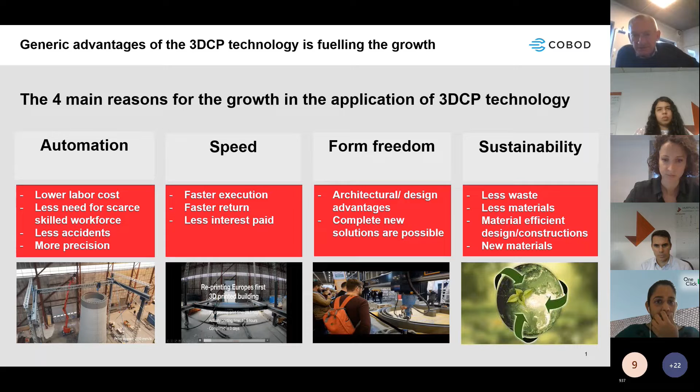The specific reason for our success is our BOD2 construction printer, which you see a rendering of on the left, and on the right you see the biggest one we've supplied so far, which was 27.5 meters in length, 12.5 meters in width, and 10 meters in height. Notice the red container standing there, and the people walking around next to it—you can see this is a big mother of a printer. It weighed 17 tons. It's based on a modular system of 2.5 meter modules, so we can build it to a maximum of 15 meters in width, 10 meters in height, and as long as you like in length.

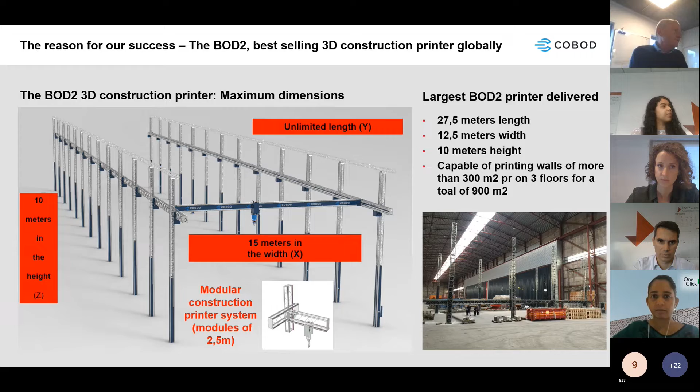It comes with 12 specific advantages. That means that because of the modularity of the printer, you can get the size that you need, so we can fit that completely.

Obviously, it comes EU certified, IP66. You can operate it outside in rainy conditions, and we have extreme speed of up to 1 meter per second. You only need 2 operators to operate it, 3 if you're doing your own concrete.

This is one of our specific advantages: we can actually print with real concrete, not these expensive mortars, but real concrete mixed on site or pre-mixed in a batching plant and then made 3D printable. We also supply full documentation and manual guides.

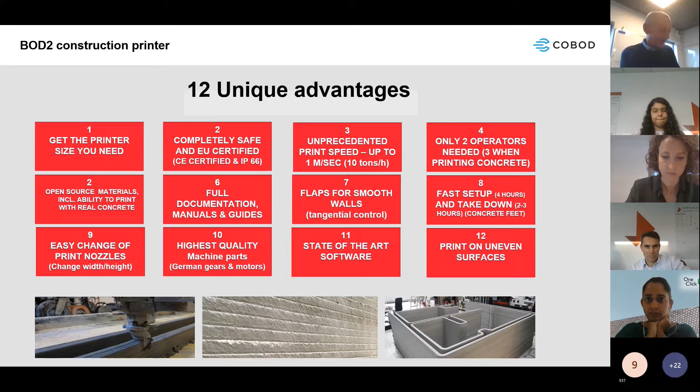Another advantage is the flaps and tangential control, which means we can smoothen the walls by putting flaps on the sides and controlling the direction of the print head. There are a lot of other advantages, but we'll skip them since we don't have endless time.

Here's an example of one of the projects our customers have done. It's important to notice we are not a general construction company, we are a tech supplier, like Caterpillar or Manitou. We supply the technology, other people use it.

This is an example from Germany, where Peri printed a 160 square meter building on 2 floors. It took 36 days, not particularly impressive, especially the ground floor where they had to get used to it. It went faster on the top floor, only 8 days. But it's fully permitted, and buyers are moving in as we speak.

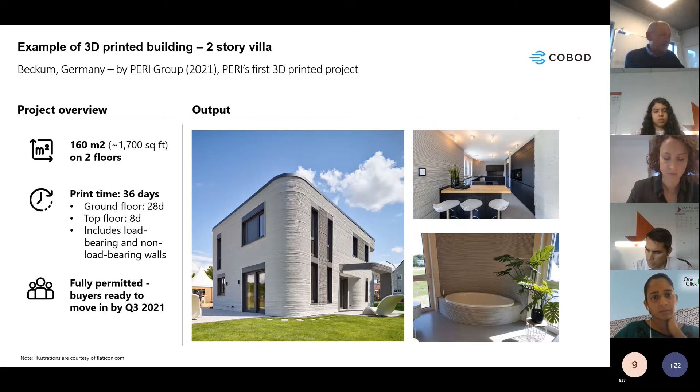Here we see the biggest building so far made with our printers, a 380 square meter building on 3 floors, made in Germany.

This is the second project of Peri, and already they improved quite a lot, down to 21 days. That's basically 60-70% of what they used on the first building, although this building was more than twice the size. So they improved productivity quite a bit. And again, it's fully permitted.

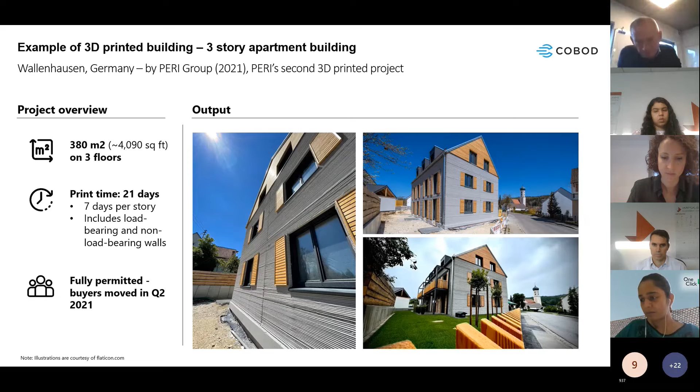This is one of the key lessons you should take home today: the power of experience. I'll give you a couple of examples. On the left-hand side, you see the start of printing Europe's first 3D printed building, please play the video.

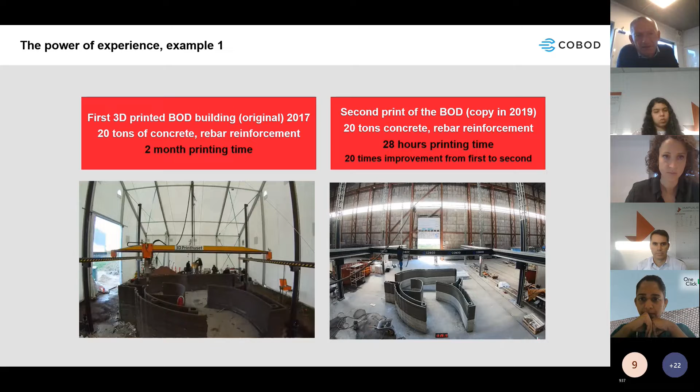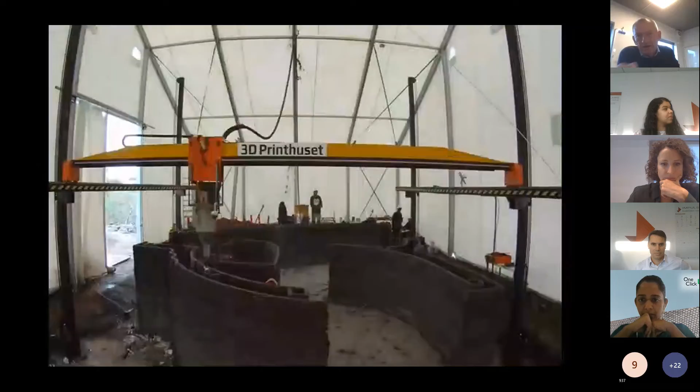This was done back in 2017, and we were amateurs. We really didn't know what we were doing. We made a lot of mistakes, to be honest. Everything was done in the open, that's how we are, we always tell honestly about our results. We were not very satisfied because it took 2 months in total.

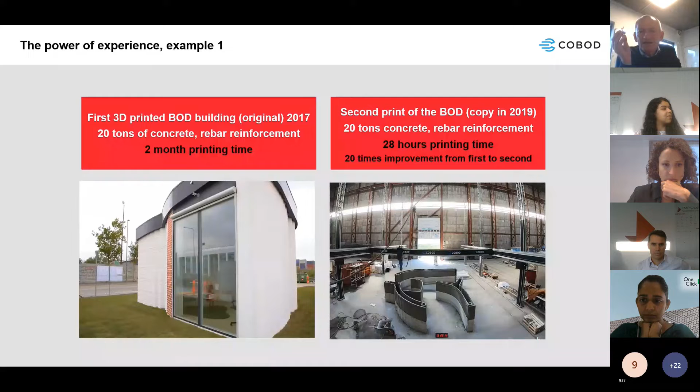But we did learn a lot. So by 2019, we said let's see, now we have a better printer and we learned a lot, let's see how fast we can build a copy of that building. So we printed it again, please show the video.

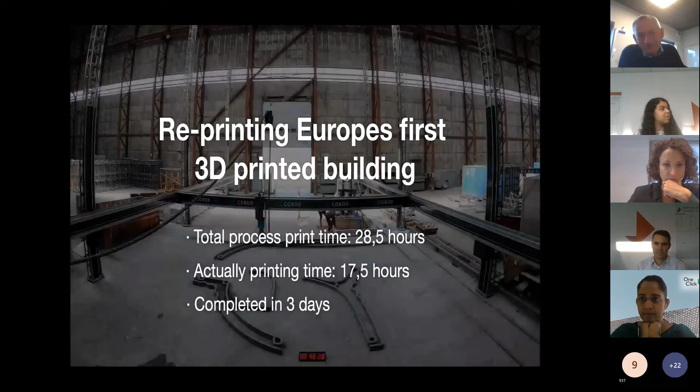One more time we took it upon ourselves to print an exact copy of what we did the first time. This time it took 28 hours. So we went from 2 months to 28 hours.

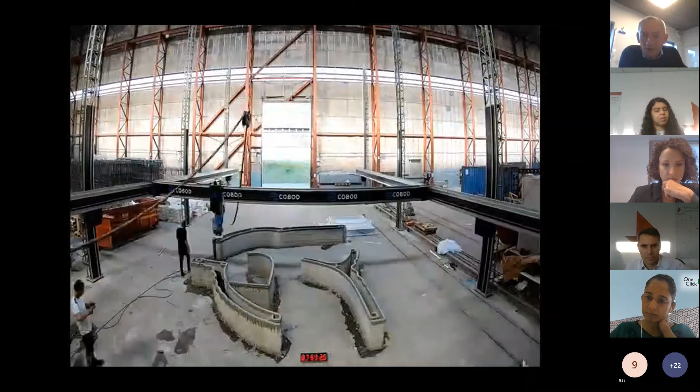The funny thing is, on the third day, where we only did about 9 hours of printing per day, we completed more than 50% of the building. That means even during the process we learned so much that we doubled productivity on the last day, which means everything else being equal, if we had to do it again, we would do it in 14 hours. That shows you some of the potential of this technology.

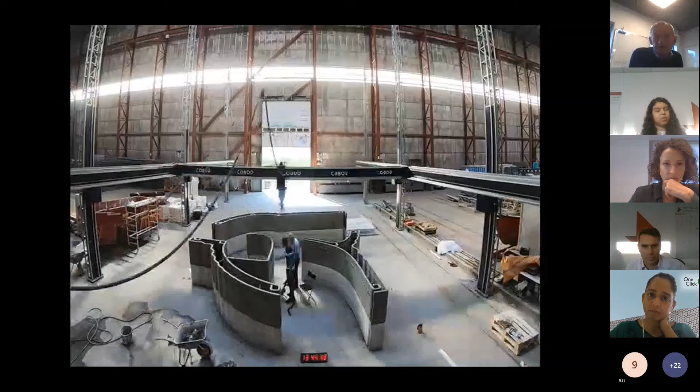Here's another example: when we 3D printed the first windmill tower, which was 100 tons of concrete and a hollow structure. It's pretty big, as you can see, 10 meters tall. It took 3 weeks. Please show the video.

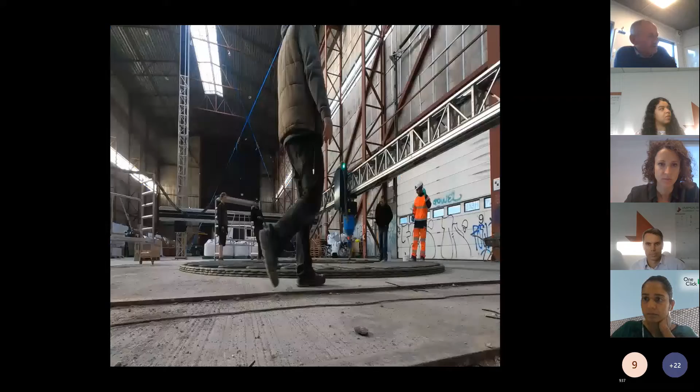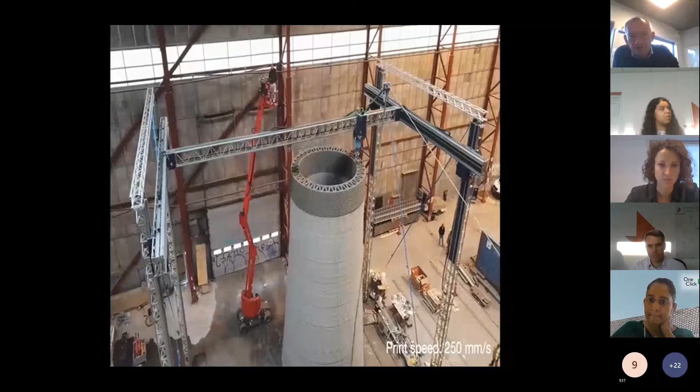And actually, the most interesting part of this print is what goes on a little bit later on. Right now we are at the lower part, everybody's walking around looking at it, but see what happens now. Now we move up in the height, and oh, where's everybody? There's nobody there, it's all automatic. There's one guy standing over there with his phone because he's bored.

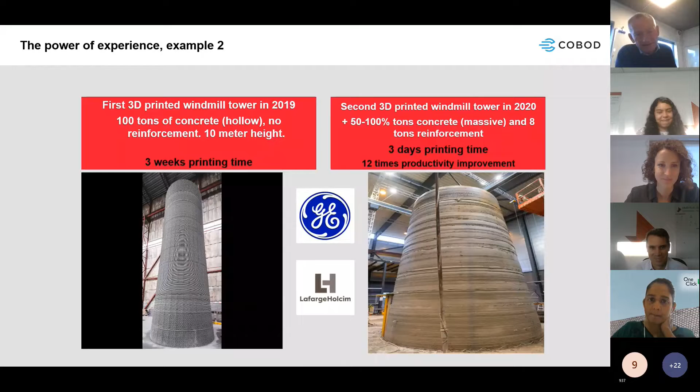He doesn't know what to do, so he's just texting his wife. Anyway, it took 3 weeks, and he was super excited saying you did it in only 3 weeks, and I was not really looking that happy. They said, 'What's wrong, Henrik?' And I said, 'Well, 3 weeks, I thought it took too long.' They said, 'But how fast can you do it?' I said, I don't know, but definitely 3 weeks was too bad. But if we did it again, 4 or 5 times, maybe we could come down to 3 days.

So we actually did it again, but with a different design. They changed the design, so now there was 50 to 100% more concrete because it became massive. And then they came and said, by the way, we also want you to add 8 tons of reinforcement. So we equipped the printer to deliver the reinforcement automatically onto the printed structure. We printed almost twice the amount that we did the first time, and we did it in 3 days. So we went from 3 weeks to 3 days, despite the fact that the amount of material almost doubled and we added reinforcement. Massive improvement of productivity again.

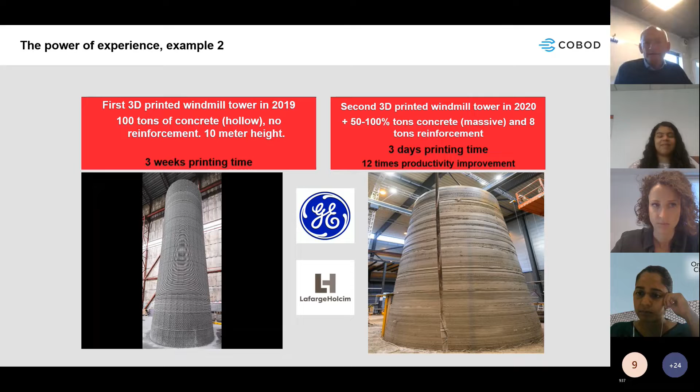That is actually one of the key learnings here: every time you do something for the first time, you will be very bad. Most of the projects we see out there are for first-timers, and obviously you can't expect to compete then. It's the same thing as learning how to ride a bike. Most of the time you were actually sitting down, falling and hurting your knee. The second time you were way better.

We were also way better when we copy-printed the BOD. We went down to 28 hours. Now, by the 5th time, when you were riding a bike, you sort of got the hang of it. Translated to the BOD building, that would mean we believe we could print it in 8 to 10 hours. And if we did it 10 times, we believe we would come down to 4 to 5 hours. This is not even utilizing the full speed of the printer. With full speed, it would take 2 hours. So it's not even utilizing the full speed of the printer, it's just mastering the process of material delivery, etc., much better.

There is a couple of economic explanations about that, it's called learning curve and economies of scale, and I'm not going to bother you with that. And with that, I think I conclude my presentation.

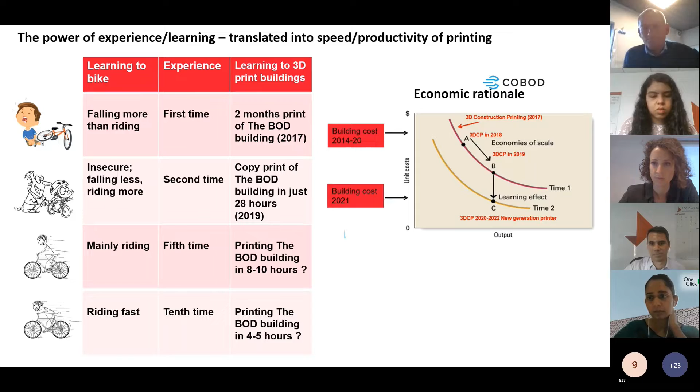We have actually a question from Shimizu, who is asking what kind of work did you provide to JGC in Japan? We sold them a printer. Unfortunately, as you know, the restrictions in Japan about COVID are very, very strict right now, so we are not allowed to go there and install it. Instead, we have done a lot of installation videos for them that we are sending to them, and they are in the process right now of installing the printer themselves.

Obviously Shimizu, I've seen some of the work that you have done, which is about columns and reinforcement and concrete structures, heavy concrete structures, and that's the same that they are going for. They are doing things like oil plants, gas plants, or fertilizer plants, etc. So a lot of concrete structures of various kinds: water storage tanks, pipe sleepers, support structures of concrete, etc. And that's the kind of thing, we did some tests for them to prove that the technology could be used for these applications.

And so they are applying it on a specific project, I think it's up north of Tokyo, but I'm not completely sure about that because again, we are not able to visit right now, so it's not so interesting for us where in Japan it is. But yeah, we think it's great because we have a customer that is focused more on industrial and concrete application, not just the housing market, because we actually think the housing market, yeah, it's interesting, but it's not the most interesting application of the technology.

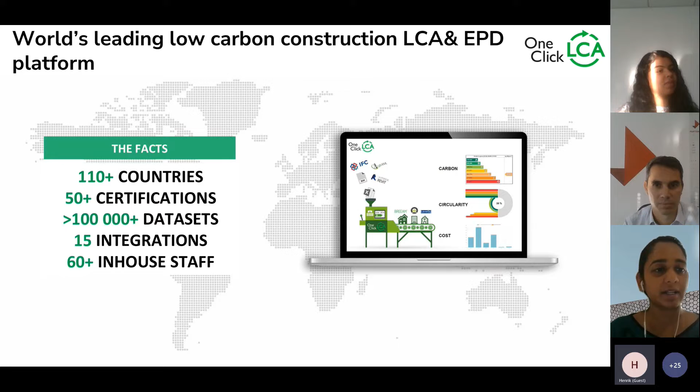What we try and strive for is to work towards market transformation at all levels to create the business environment, and to do that, we deliver software, services, data, and solutions. Regulators and investors can use our tools for getting data, for example, from builders and designers. Builders and designers in turn can use the tools to create regenerative projects or design projects for net zero carbon. And then in turn, they can also talk with manufacturers to get data on those materials for their products that will be used in different building applications.

We provide the tools for different stakeholders present in the construction industry value chain. Our software is cloud-based, and material suppliers can use our product level tools for doing carbon footprinting of their products. This data that they gather from the carbon footprinting can in turn be used in building design and construction.

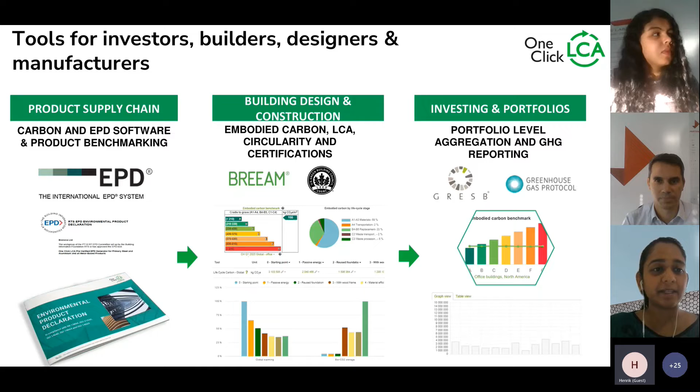To be able to use all of these different tools, you need to have a global database, and that is exactly what we provide. The database we currently have has more than about 100,000 plus data sets, and that includes data from all over the world, both environmental product declarations, EPDs which have been calculated, so your product footprints have been calculated for the products, and also generic data.

As you can see, there are different program operators that work around the world. What we do is we verify and update the data and then add it so that your sustainability teams can use it in their projects whenever they have any construction related projects.

Going a bit further into this, your material suppliers that you normally work with, because Shimizu is of course a very well-known corporation, so you definitely have various material suppliers. In addition to the data you saw before, which is publicly available data, you can also ask your building material suppliers to provide you information directly from the tools itself. We have specific tools that they can use to give you that information in terms of data.

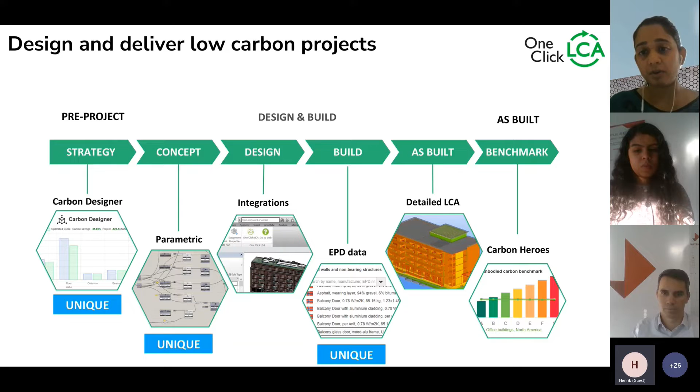It also works with a number of different integrations which are quite common in the construction industry. For example, various BIM, building energy modeling systems, or information modeling systems like Revit, Trimble, or IES, or Design Builder. Those are the integrations we support that you can use to deliver low carbon projects.

Same case on the infrastructure side, so you have different infrastructure LCA tools that you can also use with the software.

To highlight just a few, Bouygues International, for example, uses the software for their global climate strategy. In addition, on both the buildings and infrastructure side, the HS2 project, one of the largest projects in London so far, also uses the software to understand embodied carbon, its impacts, and LCA.

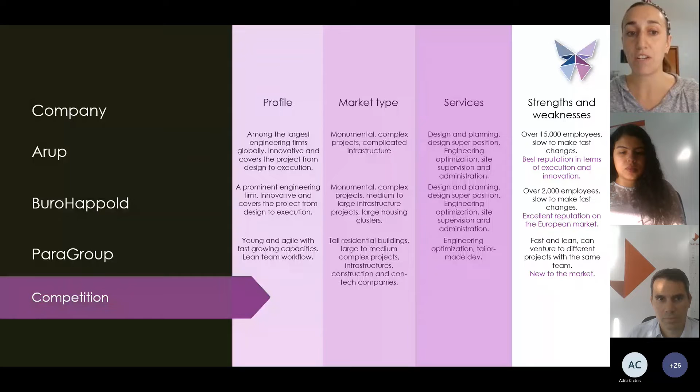Using AI for design optimization is a new field, but we already have some competitors, including Arup and Buro Happold. These large companies have strengths, including name recognition and money to invest in R&D. But ParaGroup is new, lean, and agile. We can pivot when need be, as well as take on any size project, big or small. These companies primarily work in-house, which gives us an edge to bid on hundreds of thousands of other projects worldwide. Additionally, we can tag along with these large companies where there are different stakeholders for optimization.

Our go-to-market plan is already in action. We have current projects in North America, Israel, and the UAE. We intend to continue expanding our services in these areas, as well as in Europe, using our board members, finders agreements, and our growing reputation.

Using our different types of services, we aim to market different places with specific services. Our cross-section optimization, or CSO, is a less expensive service which provides detailed analysis and an optimized solution to the client. Our holistic structure optimization, or HSO, gives a more detailed and in-depth optimized solution, and is better suited for the UAE market, for example. The potential of each of these services in these four markets is quite large, and we are already making strides in reaching our potential goals.

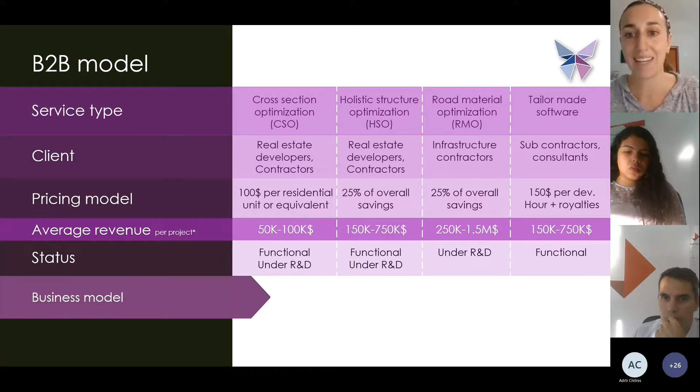Our financial plan for the next year and a half is to grow at a very fast pace. We would like to increase from 7 employees to 19 employees by the end of 2022. With a larger team, we will be able to increase our workload and take on more projects. This will obviously increase our revenue.

With increased income, we can continue our R&D for road material optimization, as well as explore other ways to optimize the construction sector.

Our employees are handpicked. We pride ourselves on finding the best and top-tiered candidates who have civil engineering and architectural backgrounds while also knowing how to code. This unique blend gives ParaGroup an edge over any other company.

The founder, Yonatan Lazovsky, had an idea that he was able to nurture into a vibrant company. As ParaGroup continues to grow, so do Yonatan's goals; he is a forward-thinking and revolutionary leader.

As mentioned, I'm Bracha Copeland. I am an experienced civil engineer. I worked for many years on the largest infrastructure projects in Israel. Using this, along with my management background, has helped me navigate the construction tech industry. I love what I do and believe this technology is the next step in construction.

Dor Schreier is our Chief Projects Officer and is our focused team leader. He is persistent and data-driven. He leads our R&D team with direction and purpose. He is an architect by trade, which helps him understand the details and precision needed to correctly optimize a project. The rest of our team is just as impressive and makes ParaGroup the company that she is today.

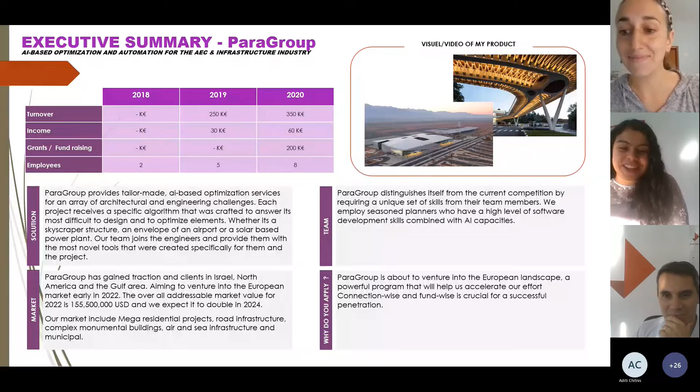Could you give some example of how you work on a project, for example?

Sure. An example of what we did is an airport here in Israel. They came to us with the airport facade. They wanted it optimized as they were over budget. We optimized the material being used and reduced the facade material by 50% in material and cost, so they came in under budget. That is one example of how we do it, or perhaps I can add to the question of how—that's my job.

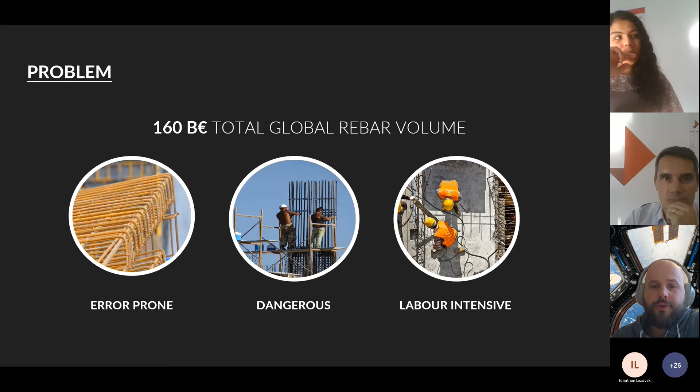Rebar is a huge challenge, a big market with a bunch of issues. The biggest issue we currently see here in Europe is that it's extremely labor intensive and very hard labor, where people are really getting hurt. Basically, they get chronic injuries from this work.

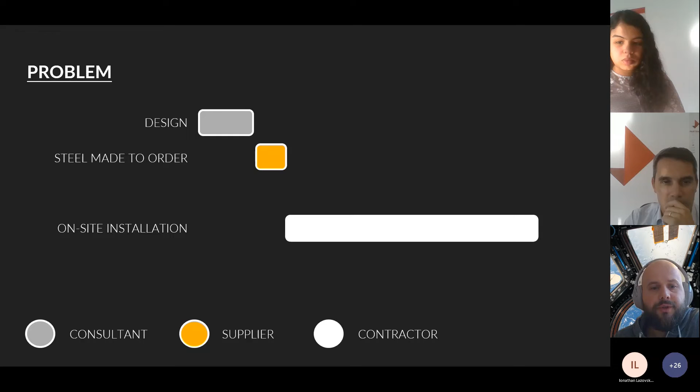Another part of the problem is that the value chain is very fractured. Typically you have a designer, a consultant that does the structural rebar design. Then you have a supplier that supplies the steel. And finally, you have a contractor that is installing the steel on site.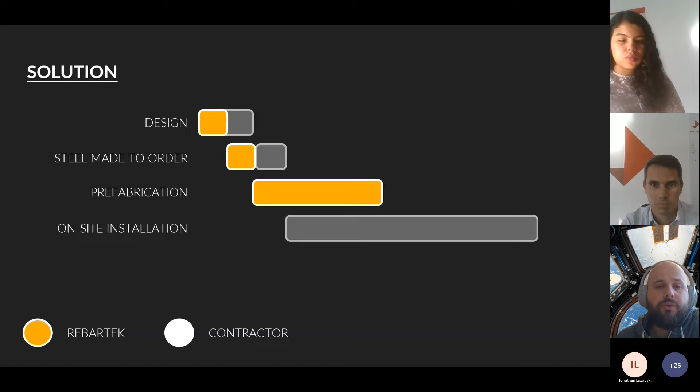So what we do here is we have a parametric design tool that I will show you soon. Then we make the steel similar to how it's done today. And then we have a process we call prefabrication, a known method, where you make the cages offsite, which leads to finishing the rebar a lot faster on the construction site. You also save a lot of labor on site, since installing a cage is much faster than single bars.

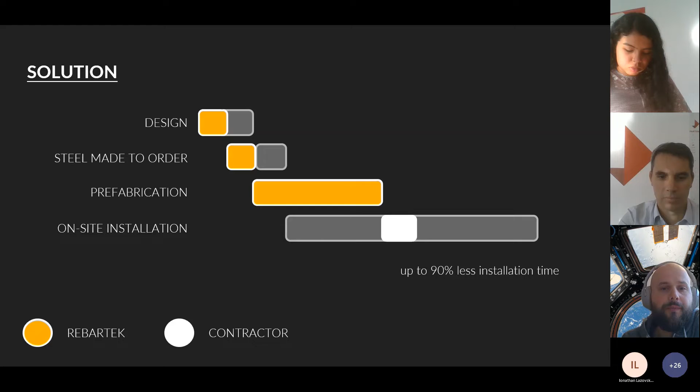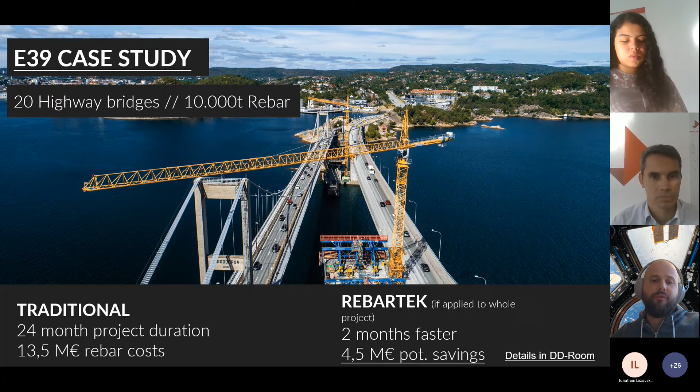In this project, we only delivered about 200 cages. But if we extrapolate the values we've seen in 2 directions—one is doing the whole project with our technology, the second is having our technology fully developed—then we can see you can save 2 months of time on the critical path of the project. And the total savings in steel, time, and labor is approximately 4.5 million euros.

So prefabrication is a known method. Basically, the whole key point of prefabrication is that you have to start at the design phase already. What we do then is connect our parametric design tool to our backend, which runs on the cloud on Microsoft Azure.

From there, you see that all the processes that come afterwards for making the cages are directly connected to the backend and automatically programmed by our design software.

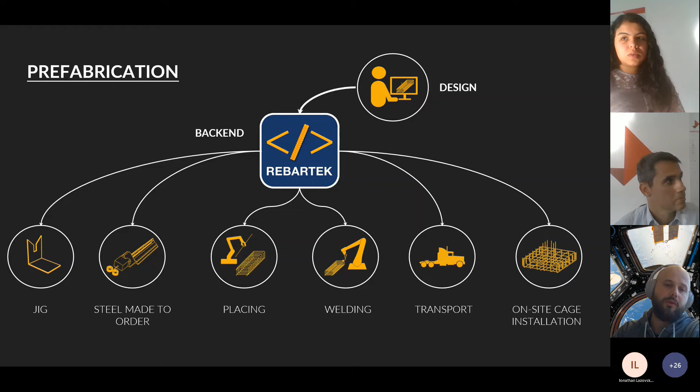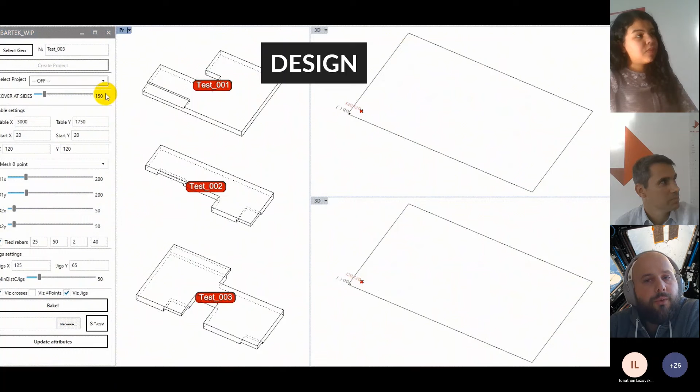Here's a quick look at our parametric design tool, based on Grasshopper and Rhino. On the left side, you see a concrete structure—in this case, stairs and landings for a building. If you change the parameters of the design of the concrete, you automatically change the rebar. But not only the rebar—also the instructions for the robot, where to weld the rebar, where to place the jig. All this is automatically generated directly from the design.

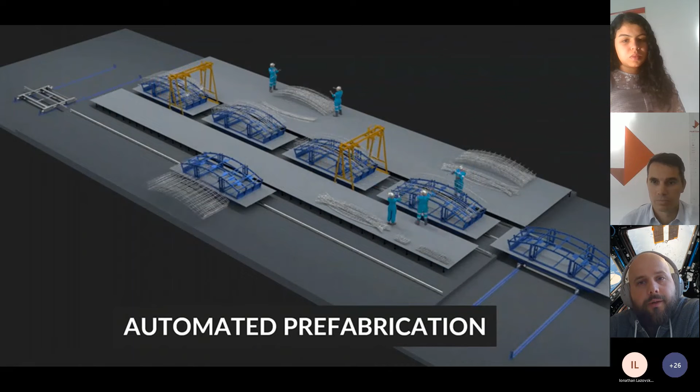Currently, we have a semi-automated process. Here you see the second version of our production line that we're launching next year, with a combination of human labor—currently humans are placing the bars—and robotic labor welding the bars together. This is for a tunnel project, and we're currently focusing on mass production projects, where we make at least 10,000 rebar cages.

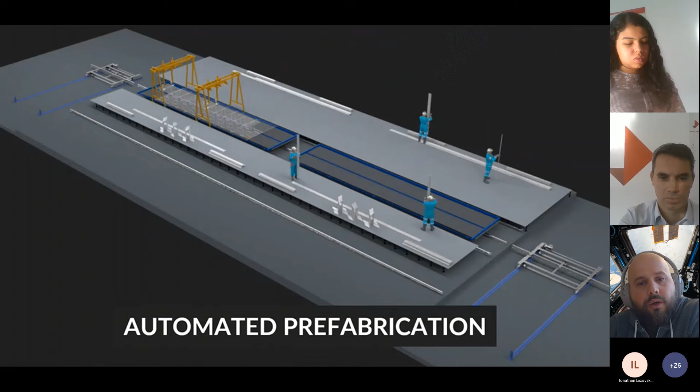Here's a different use case—the same production line, utilized in a slightly different way. Instead of making a lot of smaller cages, here we make bigger cages. Again, it's a combination of human labor placing the bars and robotic labor welding the bars together.

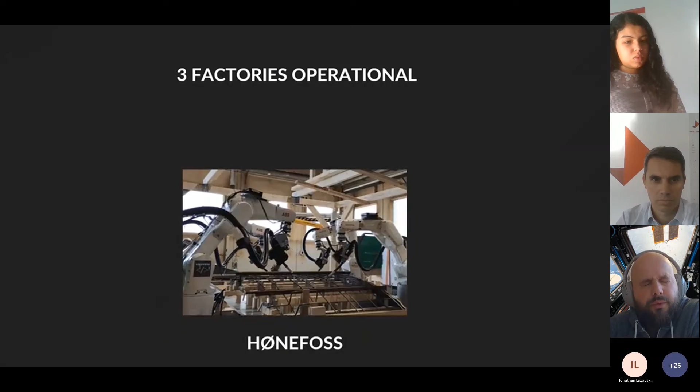Currently, we have 3 prototype factories operational. The first one, in the middle, is in Norway, working on a tunnel project. The second, on the left, is also in Norway, where we're testing more mass customization projects. The third, on the right, is in the UK, where we're also working on a tunnel project.

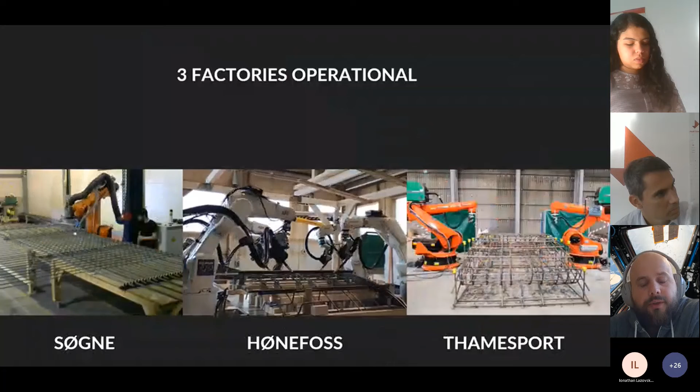Our business model is that you have a design for a project, typically a PDF or a sketch on a napkin, or if you're more advanced, an IFC file. We take that into our software, program the hardware for you, and operate the factory remotely. For example, the factory currently operating in the UK—we went there, set up the factory, and taught the rebar workers how to operate the robots. Now we run this factory remotely: the rebar workers are on site doing the physical work, while we do the programming and automation remotely from Norway.

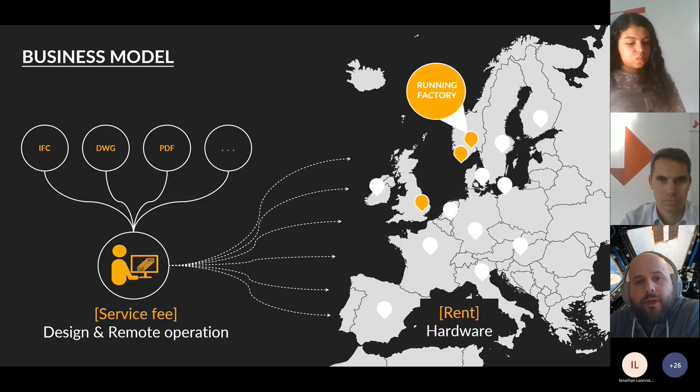Rasmus is a global award winner for structural BIM design, for parametric design. And I'm an experienced project manager that has built a lot of concrete structures. Next slide, please.

Currently we have 3 prototype factories operational, focused really on mass production of tunnel segments. The next types of mass production applications in our pipeline are wind turbines and diaphragm walls. And in a few years, we will also move towards mass customization technology. Thank you, that's it.

Thank you so much, Max. It was really interesting. Shimizu writes: thank you very much for your interesting presentation. Regarding your parametric model, how can you decide rebar specification like diameter, pitch, and so on? Is any structural analysis implemented through your parametric model?

Currently, we are not doing the structural analysis ourselves. So you would typically have someone that does the structural analysis before us and specifies the rebar, the steel quantities that you have in there. In English, we often call this the design intent - they say how much steel is supposed to be in there. And then we would take that and detail it basically into a design that is good for the machines, for the robots to produce.

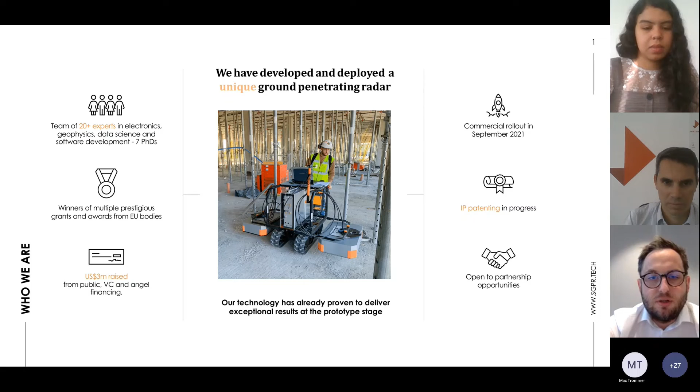And our solution, next slide please - our solution is, unlike most startups in the construction sector now, focused on subsurface rather than what's visible on the surface. There are plenty of very nice and interesting solutions from the area of satellite data, drone data analysis, machine learning, and all the cool tech. But there is not so much information provided about the subsurface, and this is an area where we've been told by the construction sector and raw materials sector that it's one of the areas that is very much lacking information.

So this is an area that is generating quite a risk for companies from subsurface related industries.

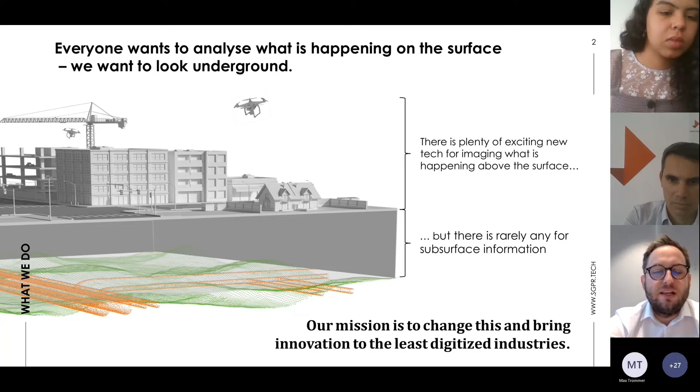Next slide, please. What we are proposing is a technology and solution built up of two parts. The first one is what we call the eye, our proprietary frequency modulated continuous wave ground penetrating radar, which has many advantages over existing incumbent impulse radars and provides orders of magnitude more information about the subsurface structures and materials.

One of the main differences is that we get information from various frequencies, with current radar operating between 150 and 800 megahertz.

Next slide, please. To make sense of that, we are also building the brain - a software that combines advanced visualization tools, geophysical modeling, and deep learning to help make sense of the data. Our goal is to make 3D models that not only tell where the materials or layers are, but also what their material composition is - something you cannot get with anything but actual drilling at the moment.

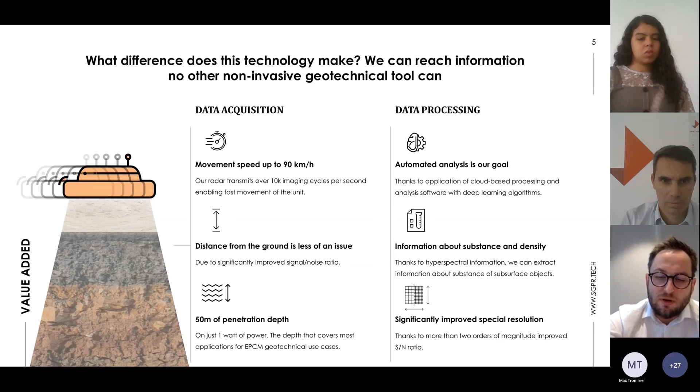So why does it matter? We could see with our radar underneath a thick reinforced concrete foundation of a building - something that is undoable for most, if not all, ground penetrating radars today. Next slide, please.

Regarding our applications in the construction sector, it's pretty much the whole value chain, because as long as there is subsurface information involved, we can be applied. We are actually in the process of testing those applications with Vinci Group, and our radar can be applied from the pre-design phase, so we can give information like this.

There is a popular notion of GeoBIM, so we can actually make it happen - giving information about what's going on in the ground and helping to map it, so the design of the building, construction, railway or motorway can be built on that. The designer can work on the soil and underground they know, building the design based on that, which can significantly reduce construction costs.

During the construction process, we can provide information from unexploded ordnance surveying, which is a huge problem in Europe after the wars since there are plenty of bombs still in major European cities, up to information about underground infrastructure, water levels, and even effects on surrounding soil structures in the event of high-rise building construction, because it alters the soil structures around it. There are plenty of applications, and we are, as I said, in the process of testing and applying them. We'll be happy to share this process with Shimizu as well.